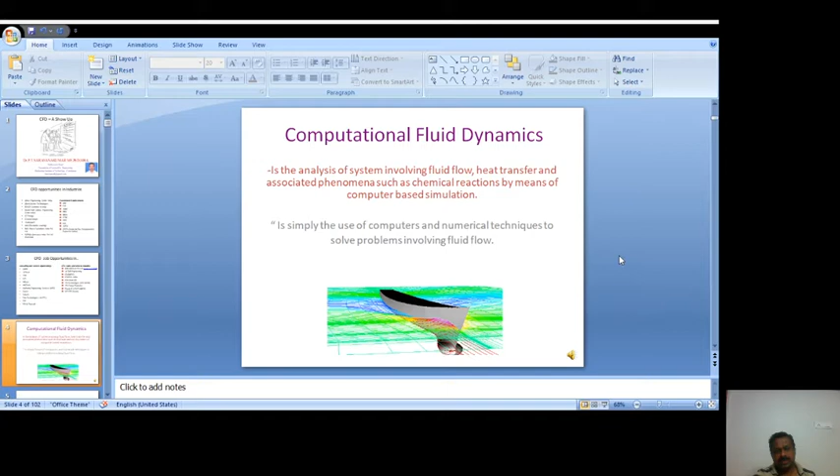Normally there are three ways you can look at it: theoretical fluid dynamics, experimental fluid dynamics, and computational fluid dynamics. Computational fluid dynamics means virtual fluid dynamics, it's called a virtual wind tunnel method.

Analytical comes near to theory as well as computation. Theory should be society oriented, and it converts into experimental. Experimental has a lot of feedback; based on customer feedback, you have to again change the model, optimize the model, or redesign the model. If you do this every time, the cost will be higher and the time consumed will be higher.

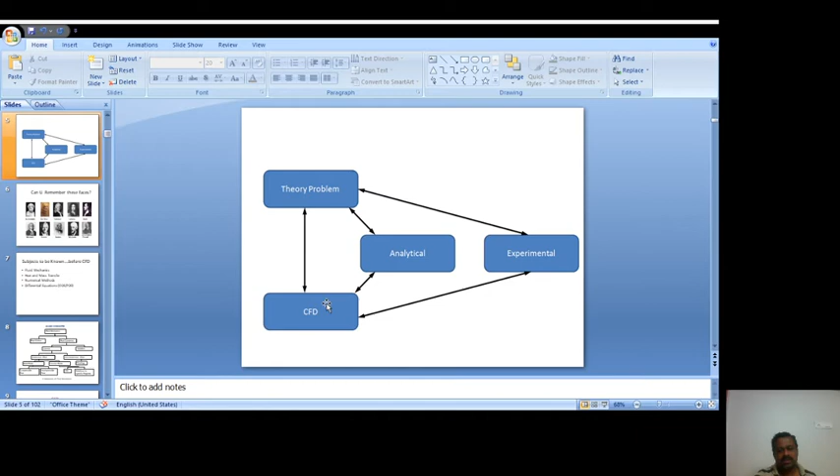Instead of that, you can use computational fluid dynamics, that is virtual simulation. You can find out what will happen if the design is changed, if dimensions are changed, or the environment is changed, or fluid properties or flow is changed. You can simulate many times, orientate many times, scale up or scale down. That is the capability of computational fluid dynamics.

This was a very important process of fluid mechanics as well as computational fluid dynamics. Without Navier-Stokes, without Bernoulli, without Newton, without Euler, without Prandtl, we cannot define computational fluid dynamics. All these members contributed the mathematics and coding for that.

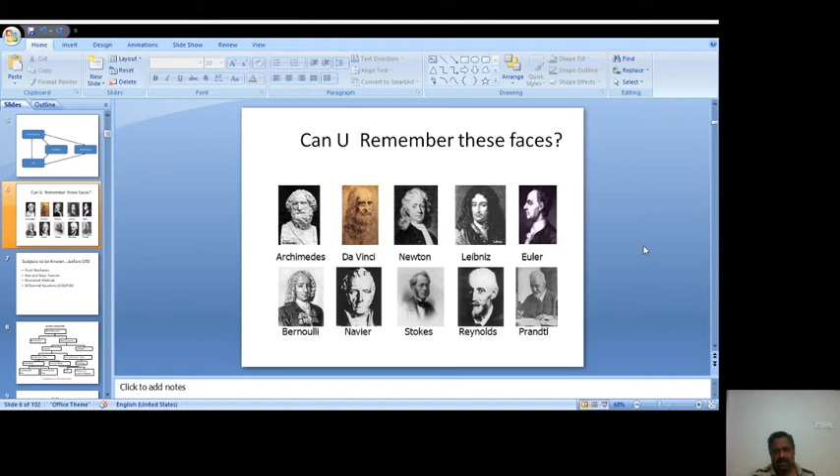So if you want to study CFD, your entry behavior should include knowledge in fluid mechanics, heat and mass transfer, numerical methods, and differential equations, both ODE and PDE.

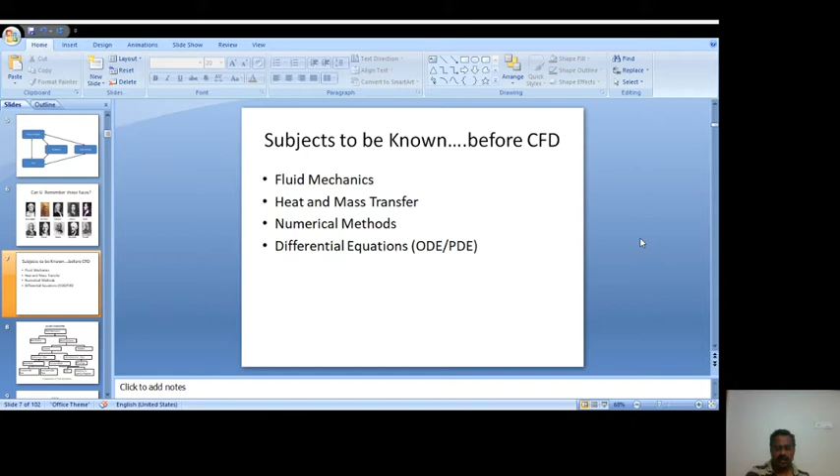Normally fluid mechanics is a branch of science which deals with the study and behavior of fluid when at rest or in motion. If at rest it is called statics, if in motion it is called fluid dynamics. This again is converted into laminar and turbulent. Based on the Reynolds number, the laminar flow is also defined, and further defined.

Again, the fluid will be Newtonian or non-Newtonian. The real fluid which obeys Newton's law of viscosity is called a Newtonian fluid; if it doesn't obey Newton's law of viscosity, it's called a non-Newtonian fluid.

Again, ideal flow versus viscosity: if it possesses viscosity, it is called a viscous fluid; if it doesn't possess viscosity, it is called an ideal fluid. It is again classified as compressible and incompressible flow, based on density variation. If the density doesn't vary, it is called incompressible; water is the best example in this case.

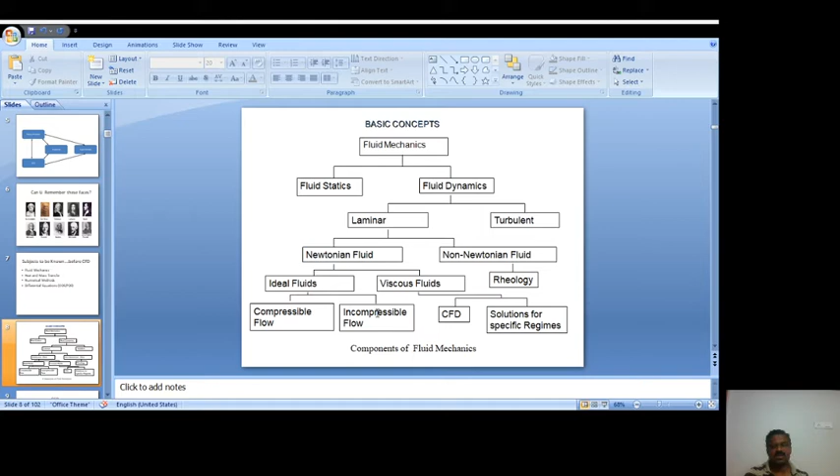So it is a predictions. Already told you, analytical, theoretical, and experimental.

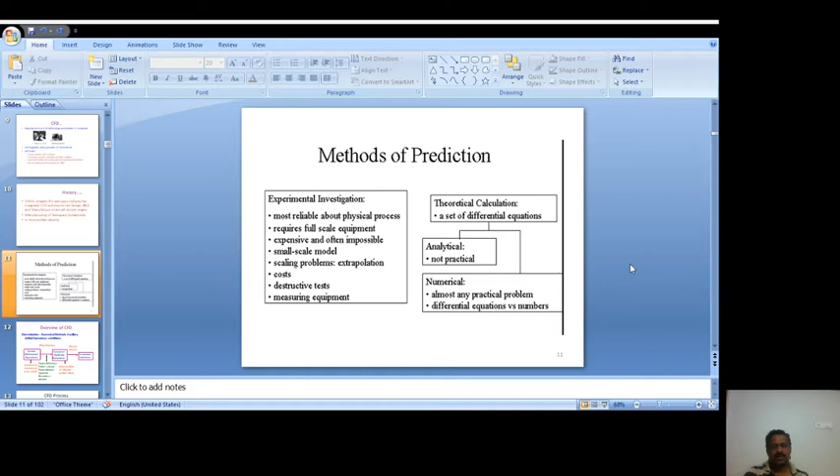This is the path of coding computational fluid dynamics. The physical problem is converted to differential equations using discretization techniques like finite element, finite difference, finite volume method. These differential equations convert to a system of algebraic equations, where you apply boundary conditions. Then this is converted to numerical solutions by using a matrix solver, either direct method or indirect method.

This complete part will be coded in a C++ language. So you can write your own code, you can write your own software. If you want to interact, you can make some GUI, graphical user interface. You can put Visual Basics. If you want the database, you can use Microsoft Access like this. So this complete software package is called CFD software. You can write your own source code also. So this is the overview of CFD.

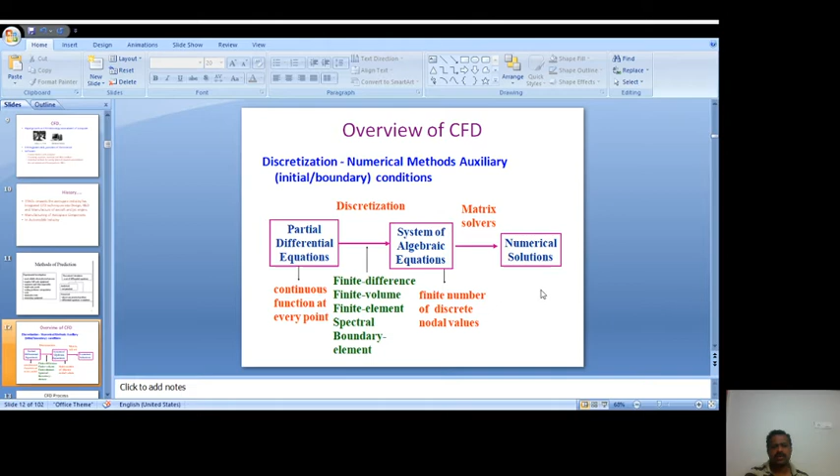The CFD process, if you go to any commercial package, starts with geometry. Based on the physics, geometry will vary. The physics, heat transfer, compressible flow properties - you have to include properties: viscosity, density, weight density, bulk modulus, compressibility, vapor pressure. So many properties are there. Viscosity is a very important property you can mention. Based on that, you can define laminar or turbulent flows.

So boundary conditions you have to mention. Then mesh you have to create - that is, the complete continuum structure you have to break into small pieces, small elements, small volumes, either structured or unstructured. There are 2D elements - triangle and quadrilateral - and in case of 3D, tetrahedral and hexahedral, something like that. Then you can use the solver, steady or unsteady, iteration or step methods, or convergence limits.

Steady and unsteady: unsteady means it varies based on time, and when the response is constant it is called steady. So you can write the report, plot the X-Y plot, get the standard plot, get animations, get vector plots. This is called post-processing. So this primary phase is called pre-processing, this is solving, and this is post-processing.

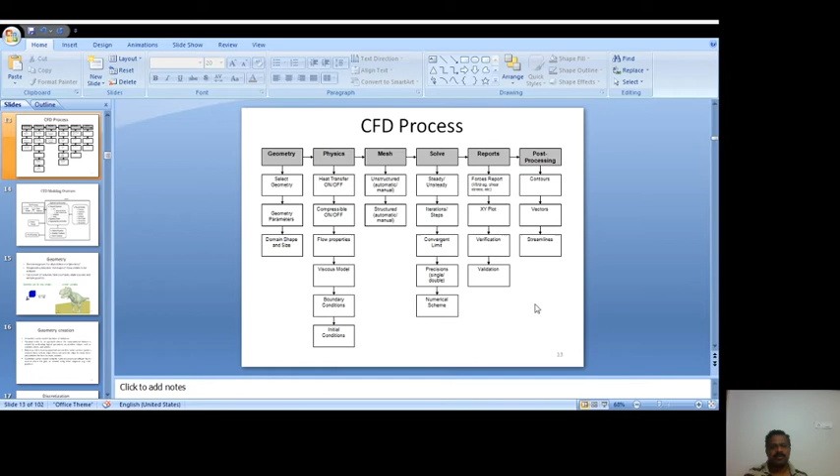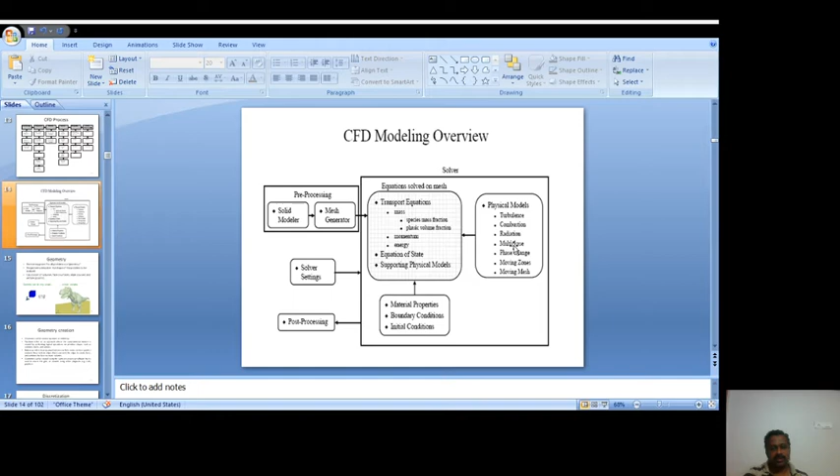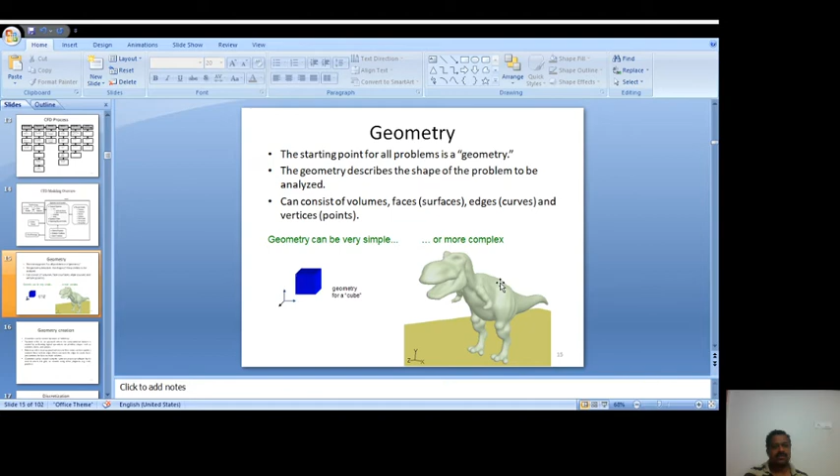This is the complete CFD process, which is common to all CFD software - the same pre-processing, solver, and post-processing. This complete structure is encoded in CFD packages like Fluent, or CFX, or Star-CCM, something like this. So the geometry may be very simple or something more complex, like mathematical elements of volumes.

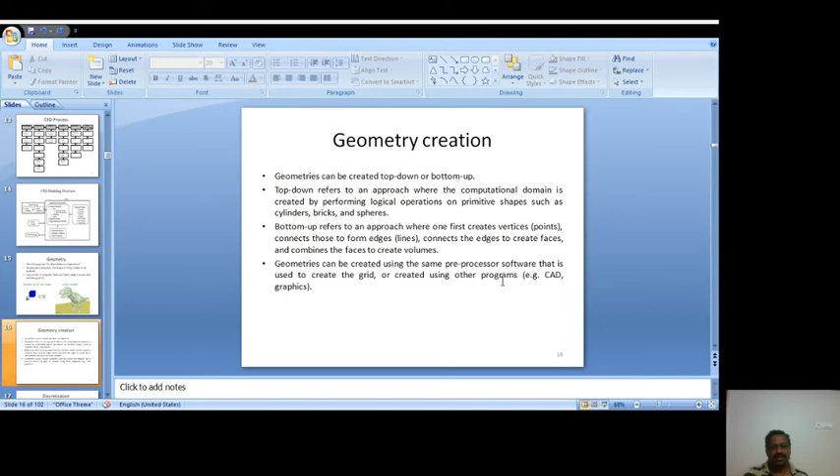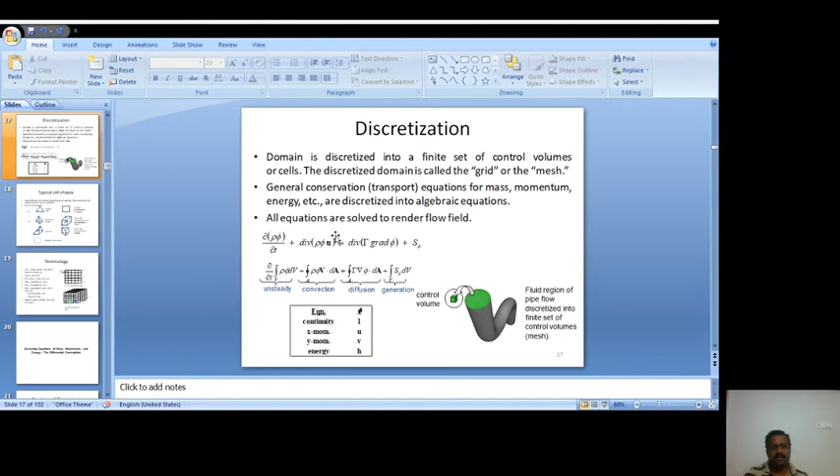This is the geometry. As already told you, you can use a CAD model, and in a CAD package you can define the geometry. From the geometry, you discretize it into small pieces or small units - it's called grid or mesh. You have to enable the governing equation for this, based on conservation of mass, conservation of momentum, or energy, whatever is applicable.

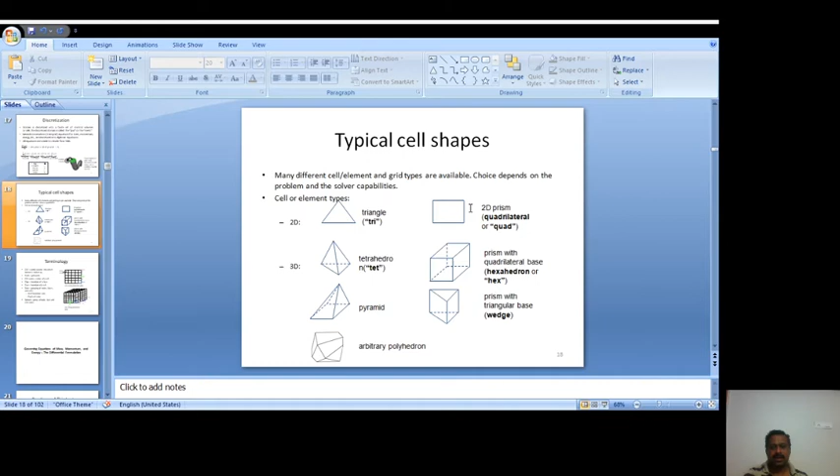You can simplify these equations. These are the 2D elements - triangle and quadrilateral - and these are the 3D elements. So for 2D cases, the elements are like this, and for 3D cases, the elements are like this.

The governing equations normally consist of conservation of mass, momentum, and energy. These three are the initial equations.

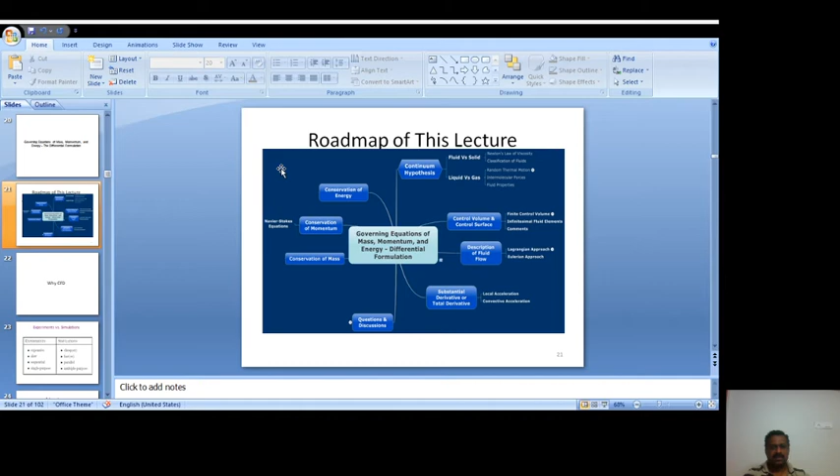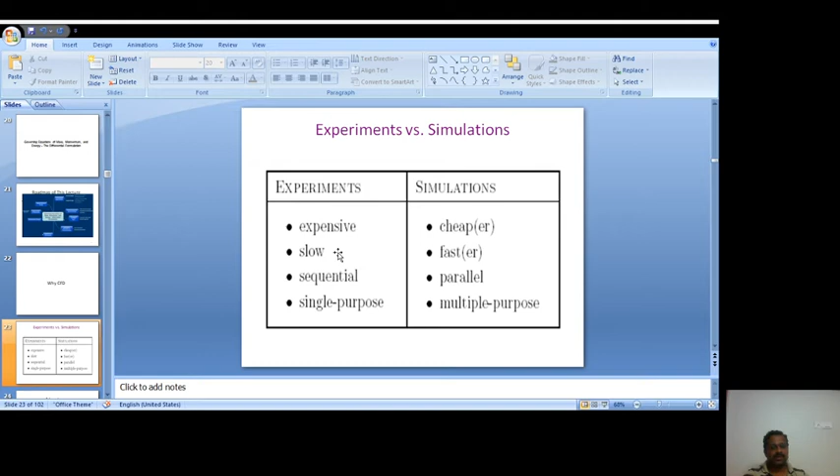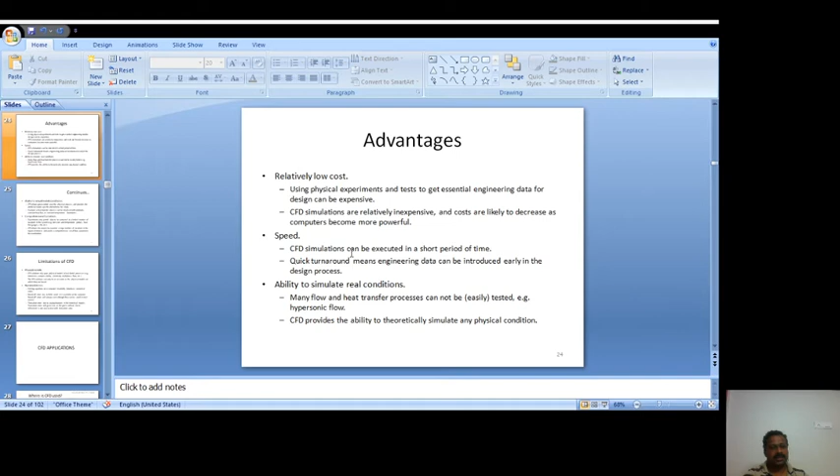The limitation is some errors are there: round off error, truncation error, inversion errors. It is at least 3 to 4% that will be there. So all the software will be approximately accurate to that range.

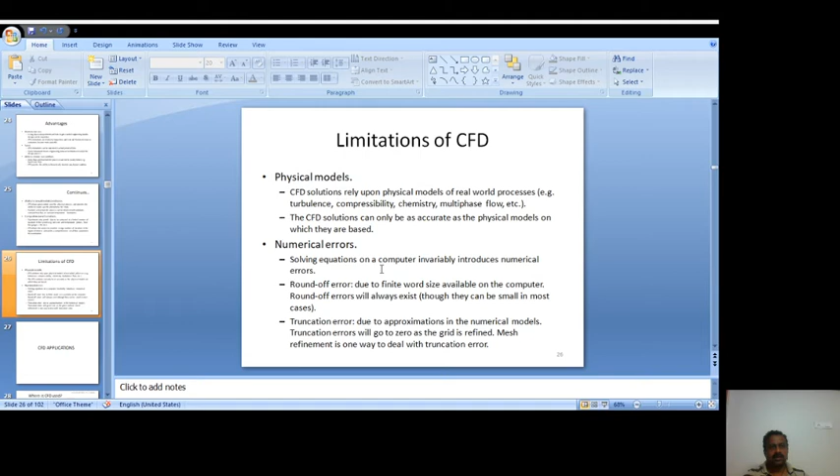Applications are plenty. If you take aerospace companies, there are plenty of applications. If you can define the nose body, how the nose body affects the drag coefficient, what will be the net coefficient, what will be the pressure, how to model the nose, how to define the nose. Even you can use automotive, you can define the aerospace model.

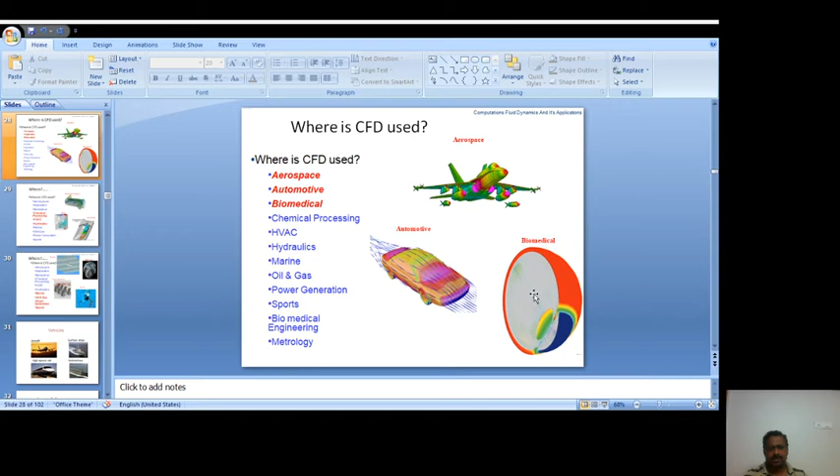This is biomedical application you can use. Even heart pumping you can use computation for. In chemical mixing of two fluids, heating and ventilation air conditioning systems, you can define the heat load calculation and refrigeration load calculation. You can use CFD.

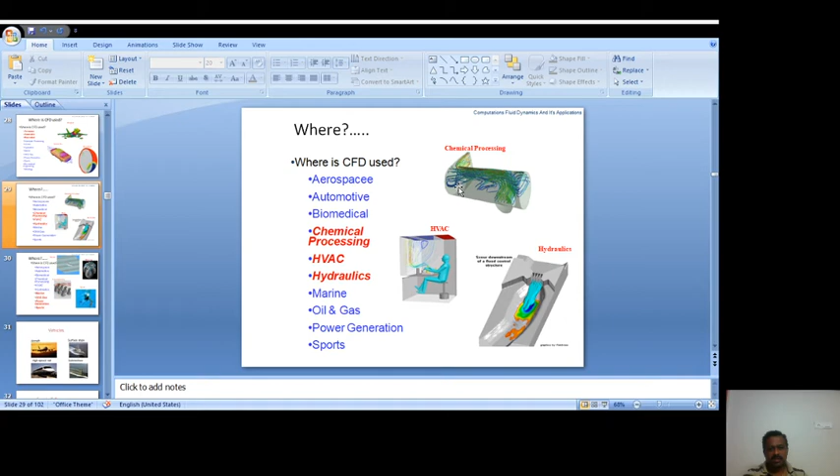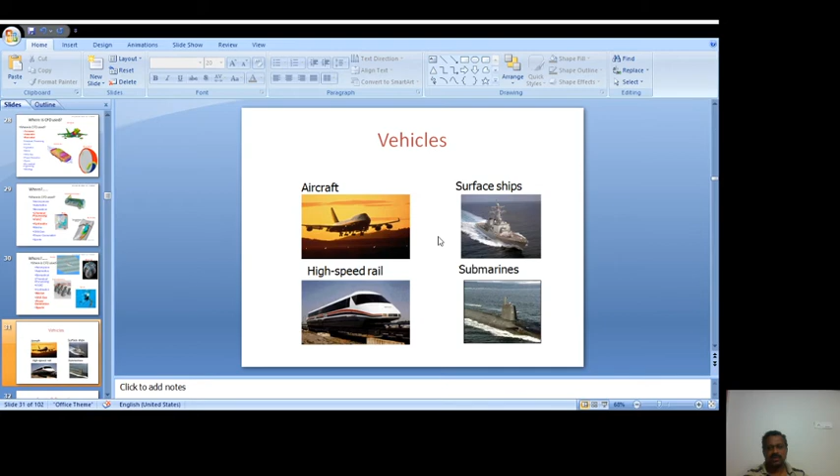So in case of marine, in case of any civil structures, you can use computation programs. In case of vehicle speed, to find land speed, and also for aerodynamic studies, and also in case of mines, you can use CFD. Sports and recreation, you can also use computation programs.

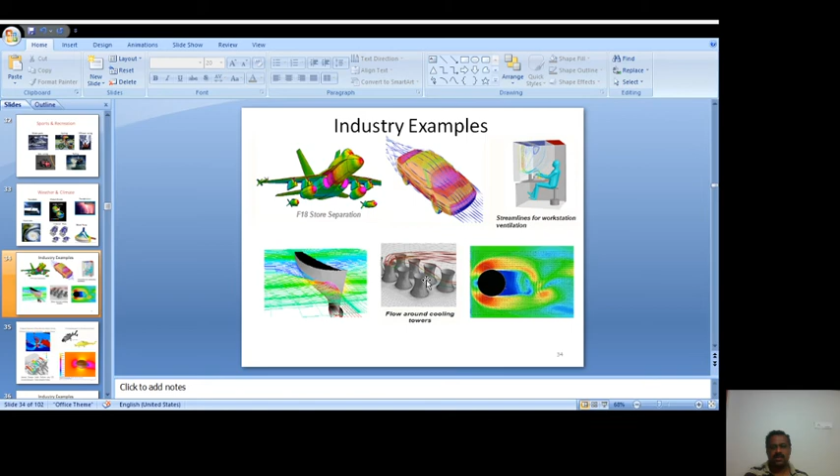Inside the engine, how the combustion is taking place, how the lubrication is taking place, how the cooling is taking place - you can study the weather and climate trends and other industries, everything with this computation. So all industries use this.

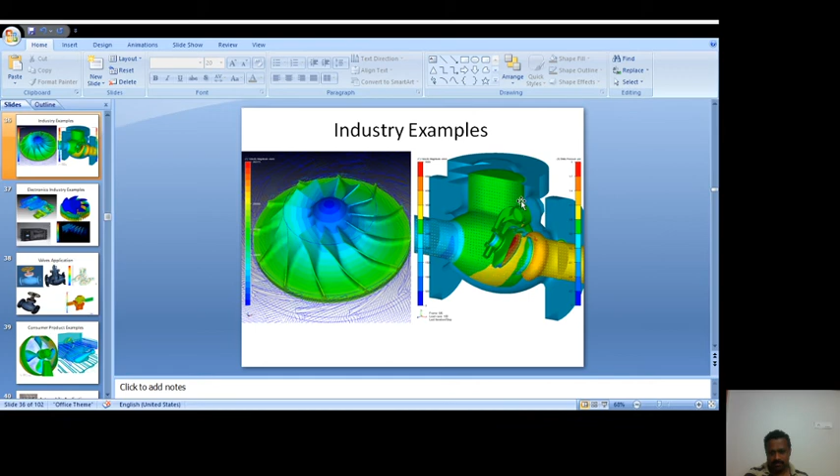So even you can define, you can use it for all turbo machines like pump, compressor, fan. Even in the case of blower, and also some valves - it's a globe valve with computation programs.

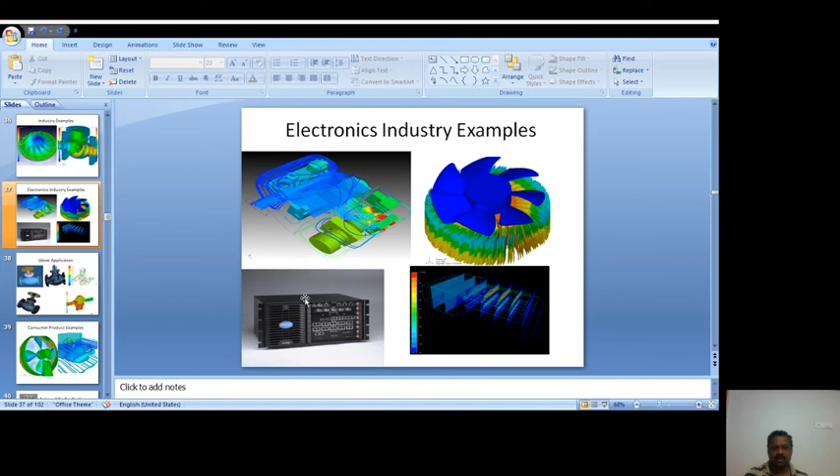In kinds of fans - in case of computer CPU, above the CPU there is a fan. That is to cool the CPU, there is a fan available. You can define how the forced convection is taking place. Once it transfers in this particular electronic component, you can see this.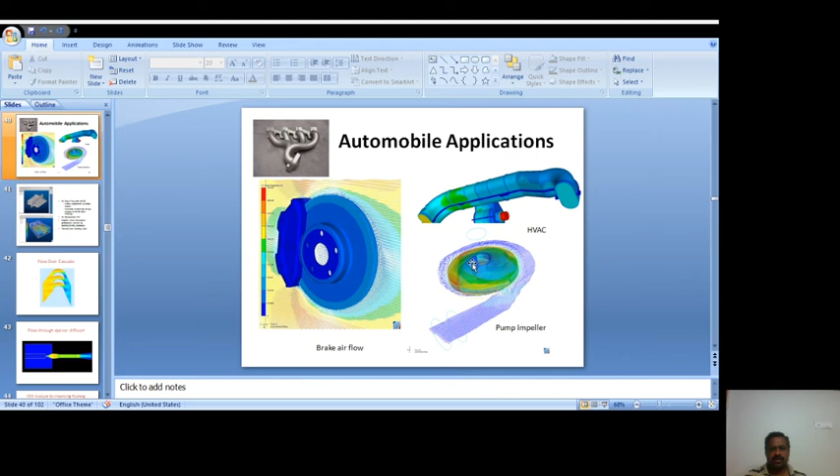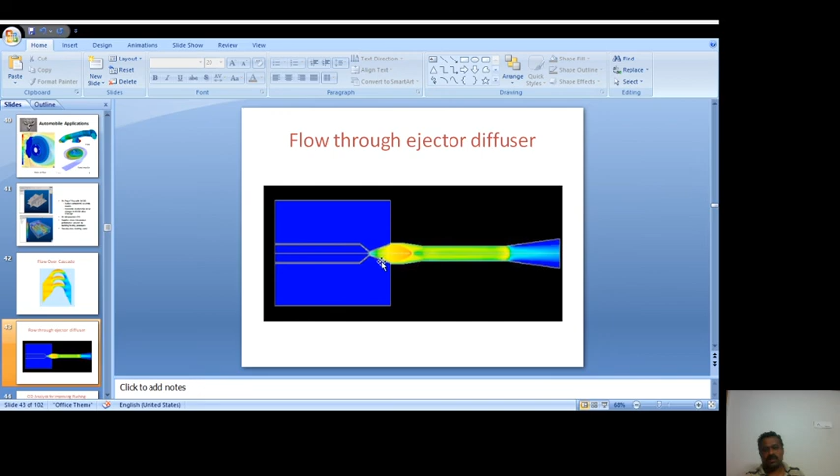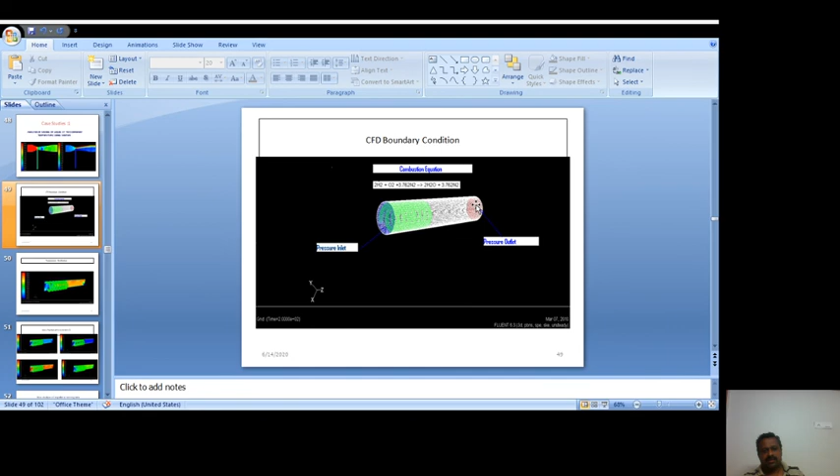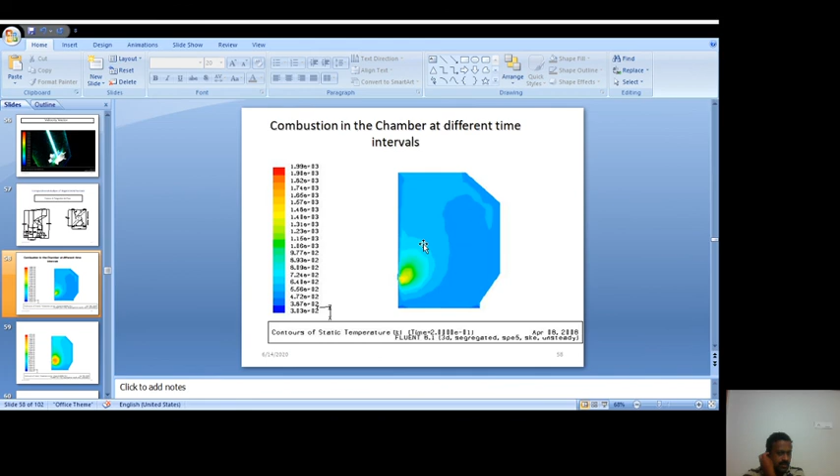In case of a furnace also, you can use CFD to find out the combustion - the complete combustion you can study based on the time. So complete combustion you can use CFD for.

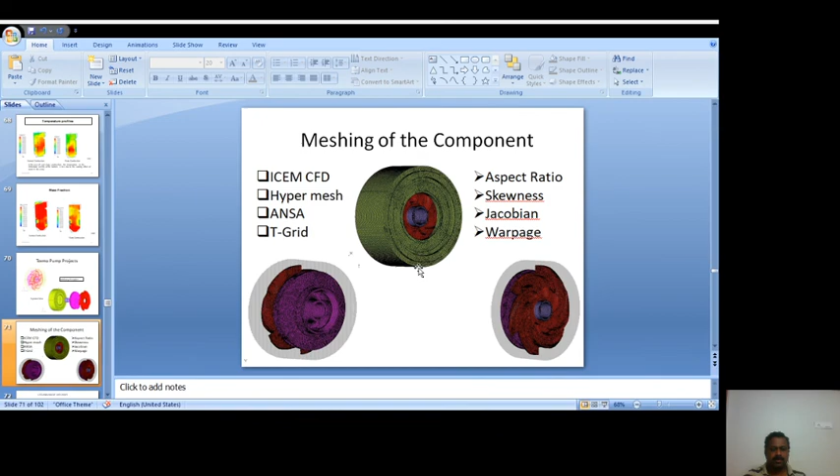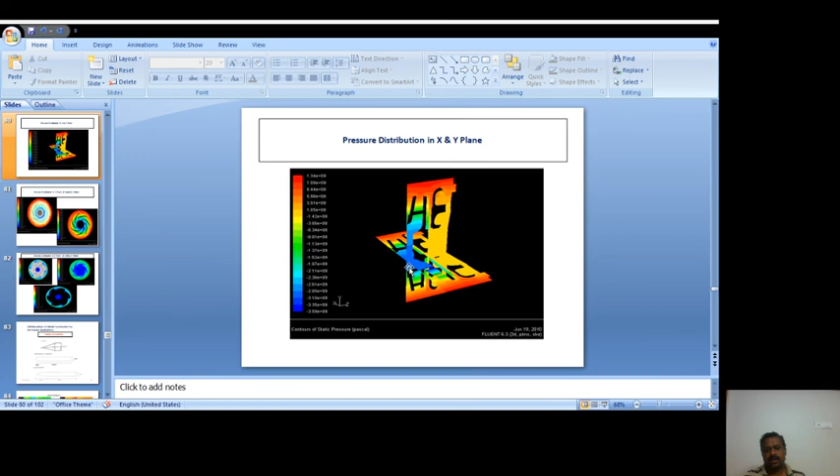So you can use a lot of these tools - if you have the time, if you have an idea, if you have the knowledge, you can do magic in CFD. So these are the applications.

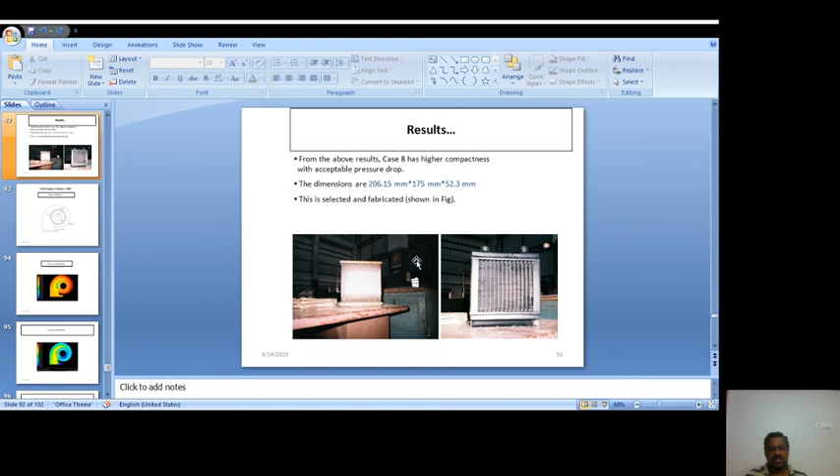Here heat is also used to find out the heat transfer rate, different pitches and tubes, even shell and tube heat exchangers, how the pass will be, whether the pass is effective or ineffective - to find out, you can blow air, you can do the calculations.